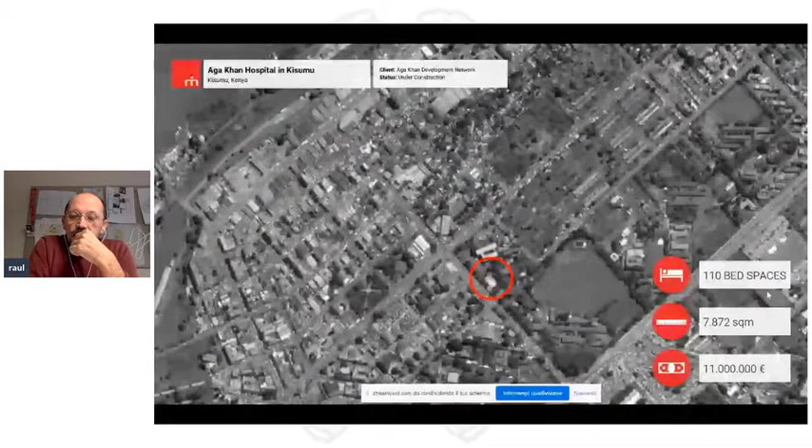What I'm going to share today are just a few projects focused on the African continent. I'd like to start with a sentence said by the master jury of the Aga Khan Award, which we won in 2013, summarizing our approach: that it is possible for a low budget project to combine functionality with design, utility with beauty, affordability with excellence. I think the jury perfectly captured the approach we want to share in our work.

The first project is a recent one we developed in Kenya, in Kisumu, for the Aga Khan Development Network.

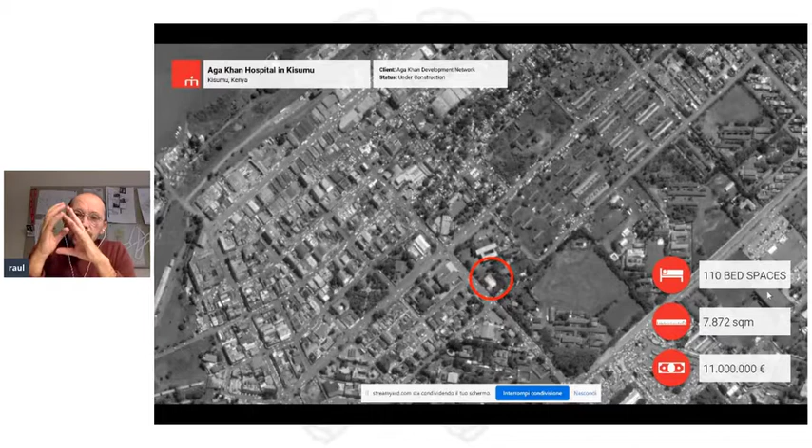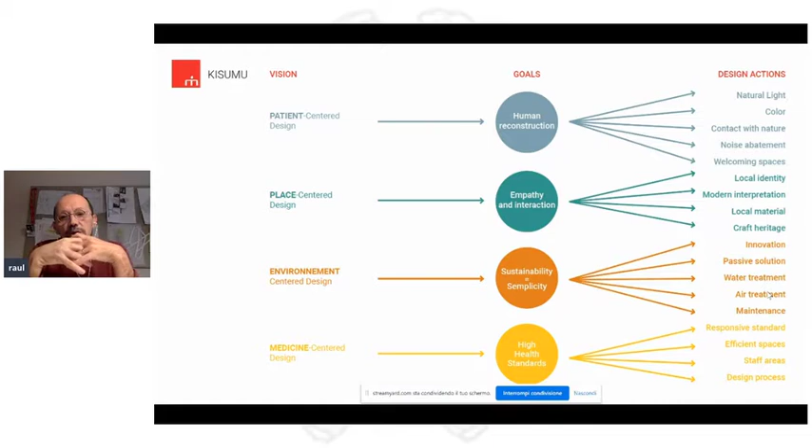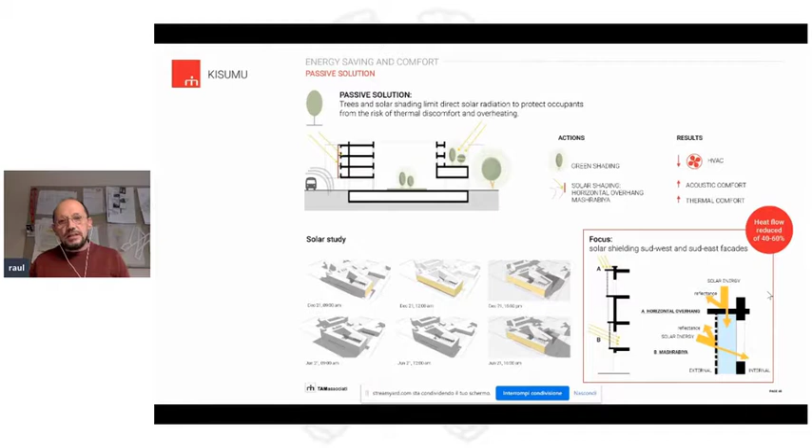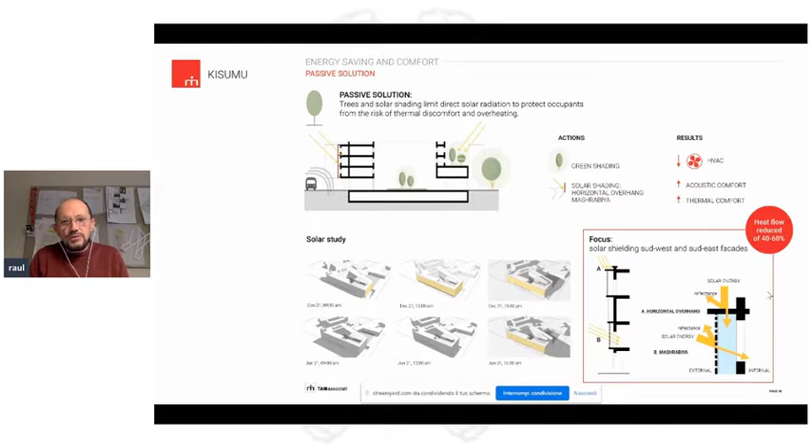The first thing we normally do in any project is study the environmental conditions surrounding it. So the design starts from deep attention to natural resources, the natural position of the building, and how we can work on its passivity to perfect its capacity to react to environmental conditions. The result of this approach was a very compact building with a central courtyard that works like a chimney to generate natural ventilation.

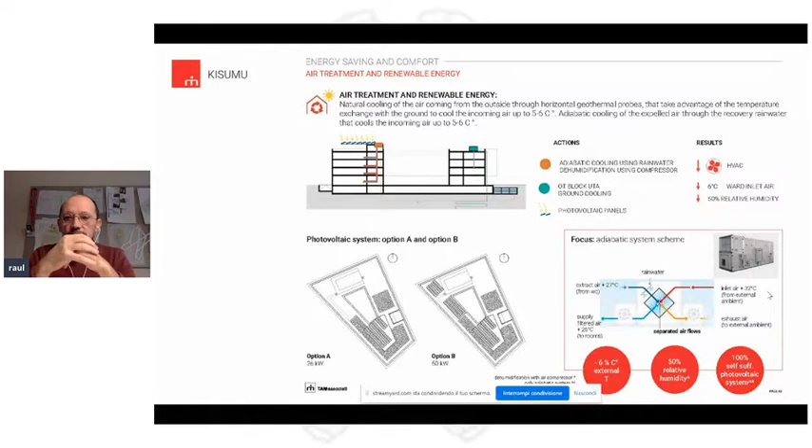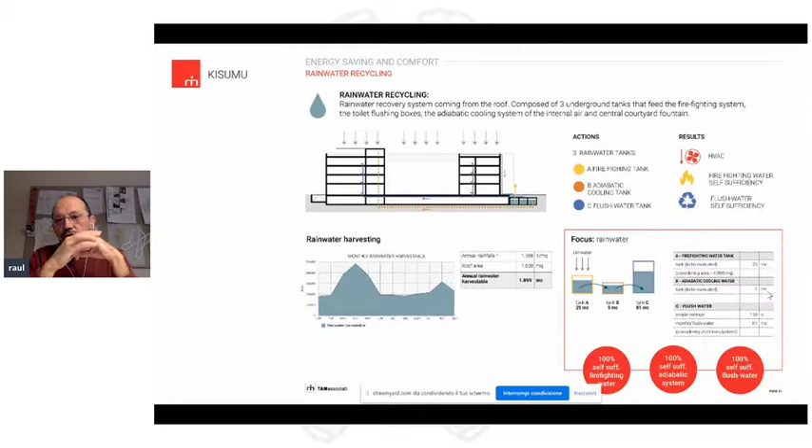From this point of view, we designed all the equipment trying to minimize the use of equipment, energy, and resources—in this case also recycling water, with rainwater harvesting used for cooling and other activities in the hospital.

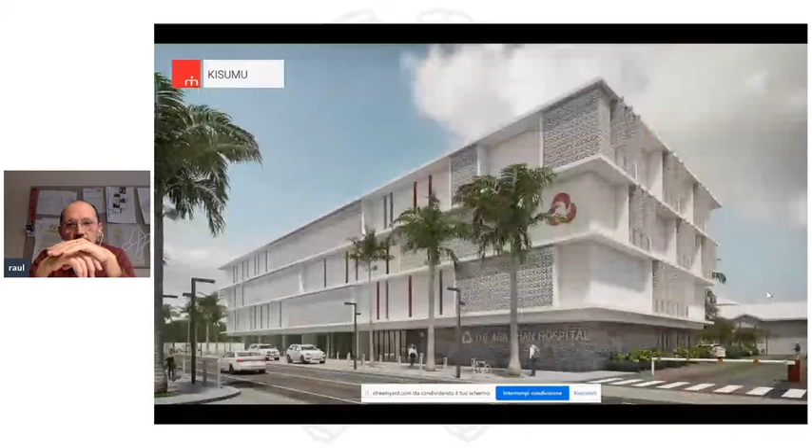This is just to give you a clue of how the design of a building starts, not from an abstract idea, but from the environmental impact of the building that is leading the design.

What I would like to share with you now are some examples of hospitals we designed for Emergency, the biggest Italian NGO, like Médecins Sans Frontières. It's an NGO that works since 1994, basically all over the world, providing hospitals that give health treatment free of charge in regions of poverty, of war, or in very complex contexts.

Specifically with the project called African Network of Medical Excellence, this project was organized through the NGO with the Ministry of Health of several African countries, including Ethiopia, with the idea of setting up in different countries centers of excellence that could spread their service to other countries—creating a network of hospitals of excellence to provide healthcare to the whole continent, using airplanes and this kind of connection.

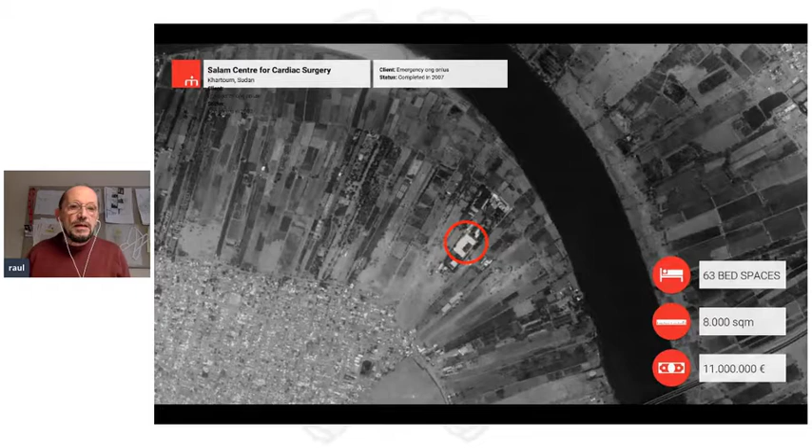The first example is a very old hospital, from 2007, the cardiac surgery hospital based in Khartoum, called Salam Center. It's a small hospital providing cardiac surgery. This hospital has been the first hub of this network, and the hospital we are going to share with you today, the Uganda Pediatric Hospital with Renzo Piano, is part of this network.

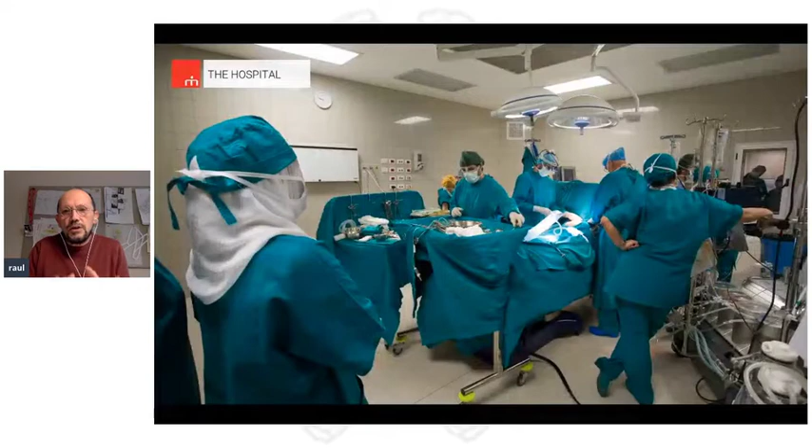As you can see, the hospitals are very basic structures, very simple, using as much as possible the local resources, but especially using the capacity of the hospital to be embedded in the surrounding. Here we are on the shore of the Nile River. The use of green, of nature, has been the basic element to design the hospital, so the hospital has been designed around the natural resources.

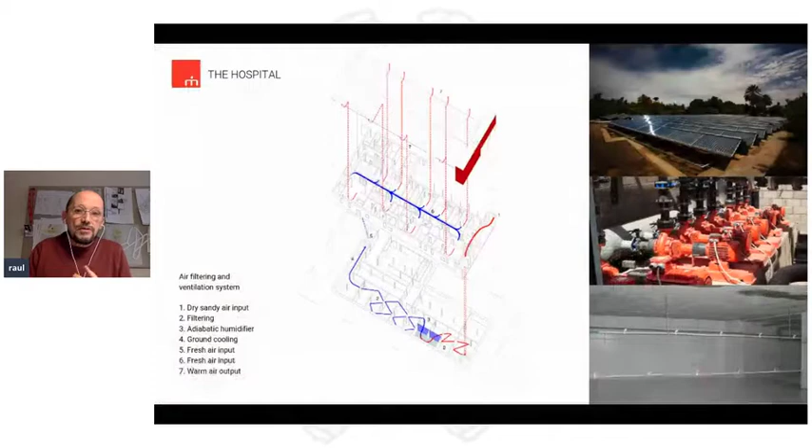This has been one of the biggest installations of solar water panels, transforming the heat of the water from the solar panel into the cooling of the system. This was one of the most innovative projects at that time for cooling in desert areas, using solar resources and water cooling.

Next example of using resources is the container compound—we used the containers we brought into Sudan with the medical equipment, 92 containers, and transformed them into a compound for the medical staff. You see here the use of this double shell to protect the container from direct sun, essential to the sustainability approach of this project.

Again, the hospital is designed around the garden and the green present in that area. With this project, by introducing the plantation of the garden, we could save 76 tons of CO2 emissions.

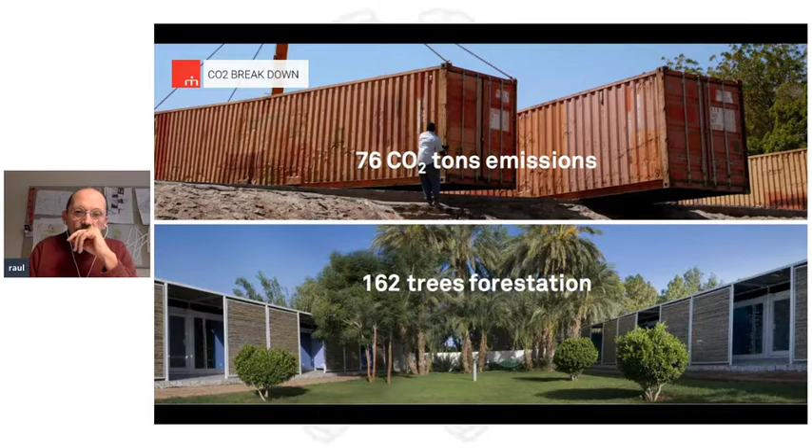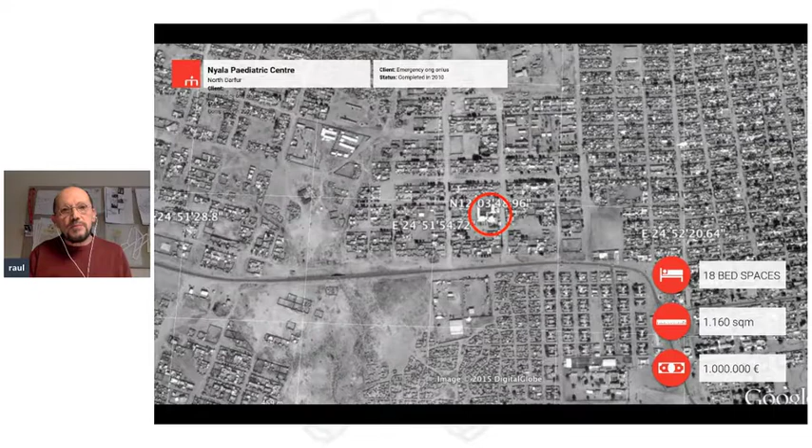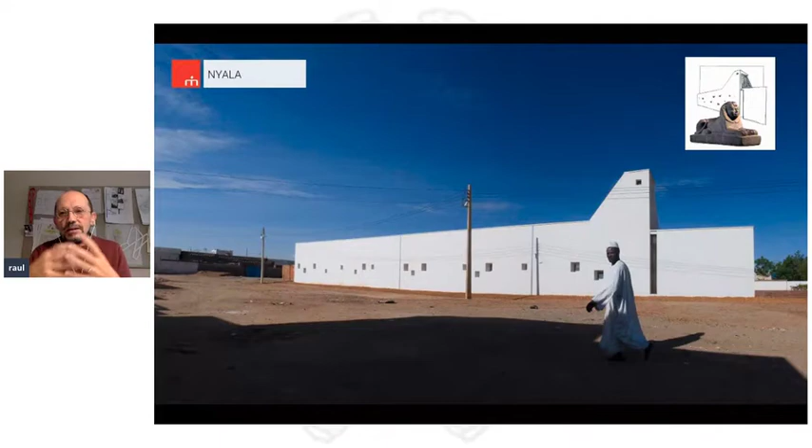These are small projects developed around the Salam Center—two examples in Sudan that are hubs serving the main hospital. The hospital has been designed in a very low profile in terms of integration in the genius loci of these small cities in Sudan, and inspired by physiognomic elements typical of that culture. The wind tower you can see growing up is part of this approach of designing a project that can be understood by the local population.

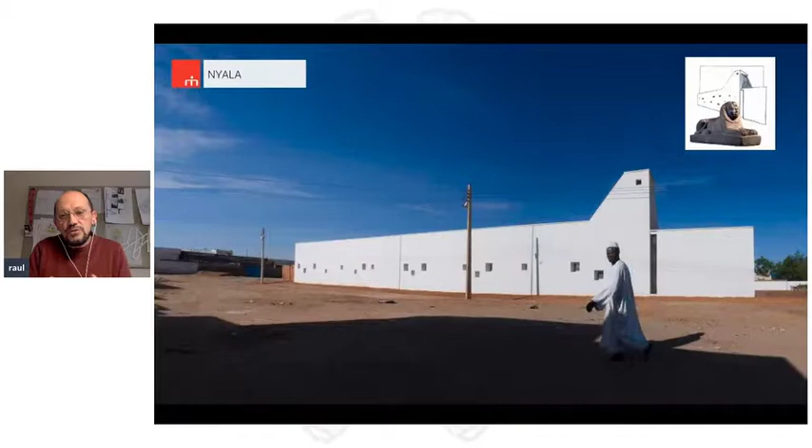This is the central garden. Gardening is the crucial element in the process of healing.

Here we developed the project of adiabatic cooling. Basically, we catch the air from the wind tower, bring it into the basement, the air is washed, and then with the adiabatic cooler, we inflate the air into the building. Through this passive system, we could succeed in cooling 800 square meters with 6 kilowatts—basically the kilowatts you'd use for one AC unit—just to cool the whole hospital.

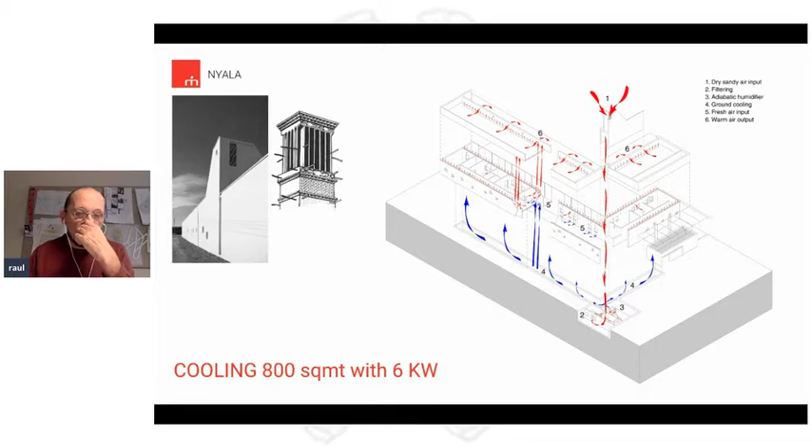The other example is the pediatric clinic in Port Sudan, an important city in Sudan. It's the main harbor, with a lot of problems with refugees coming from different wars.

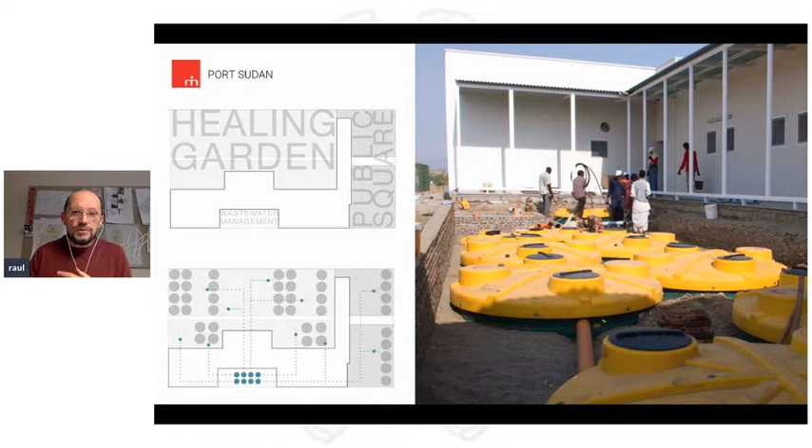Again, the clinic has been designed starting with the idea that we want to bring a garden into that desert. So the design of the clinic starts from this idea of recycling the water, generating a system of recycling the water of the clinic to create the garden.

Here you see this became sort of an outpost in that area, because this is the only garden present in this huge desert area. So here the design of the hospital starts from the approach to sustainability and environmental design.

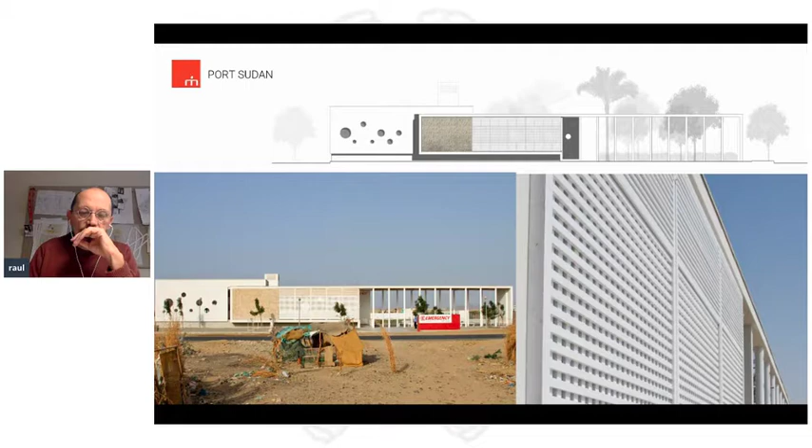These are some slides of a very small clinic, and here again we improve more and more the system of adiabatic cooling that we experimented with in different hospitals. So we succeed in cooling the hospital with very low energy. This has been extremely successful because it gives the hospital extraordinary resilience in terms of approach to the local context, the limit of electricity, the limit of energy, and the limit of resources.

Now we come to the pediatric clinic, hospital, in Uganda, which has been this extraordinary experience that we developed with the Renzo Piano Building Workshop together with Milan Engineering. It's a 78-bed, small hospital. It will provide surgery for the whole region, pediatric surgery, and will somehow be the second hub of this African network of excellence hospitals.

It's based in Kampala, very close to Entebbe. As you can see, the approach of the organization tries to choose a location that gives quality to the patient, because nature is also part of the healing process.

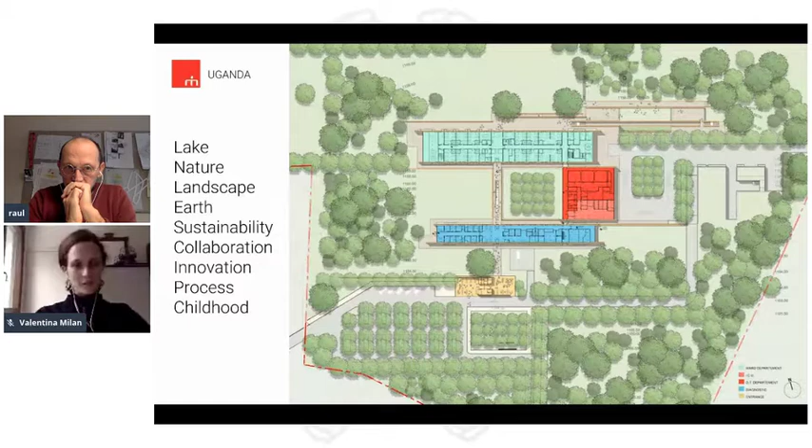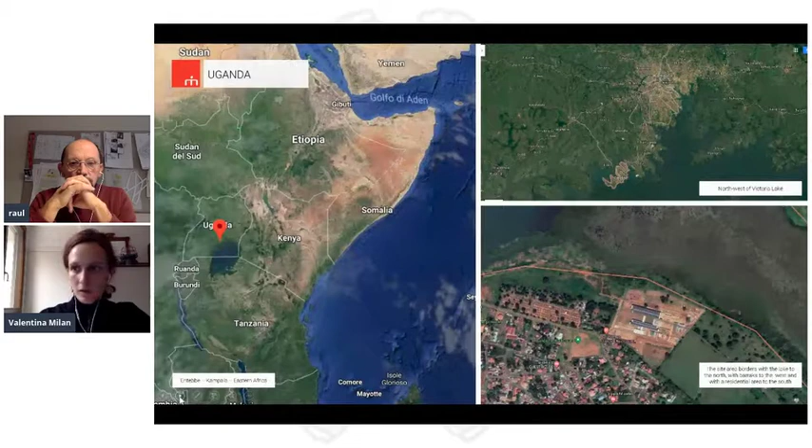So the hospital is really close to Victoria Lake, so the relationship with nature and water is very important. It's close to a residential area and close to a barracks area, a military area, and it faces Victoria Lake.

The structure is a comb structure with three main buildings, let's say four with the guest house, and five with the entrance blocks.

So through these five blocks we get to the entrance, and then we pass through all the buildings with the entrance and examination areas. In red are all the operation theaters and ICU functions, and up here in light blue is the ward area for children.

It's important to say this is a hospital just for children, and because there are young people staying here, we thought - it's something very common in emergency projects too - to have a guest house where the family can stay during the children's stay, for the family too.

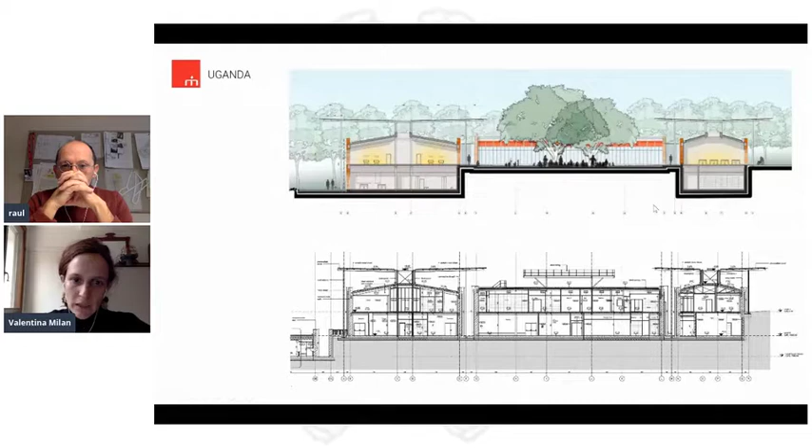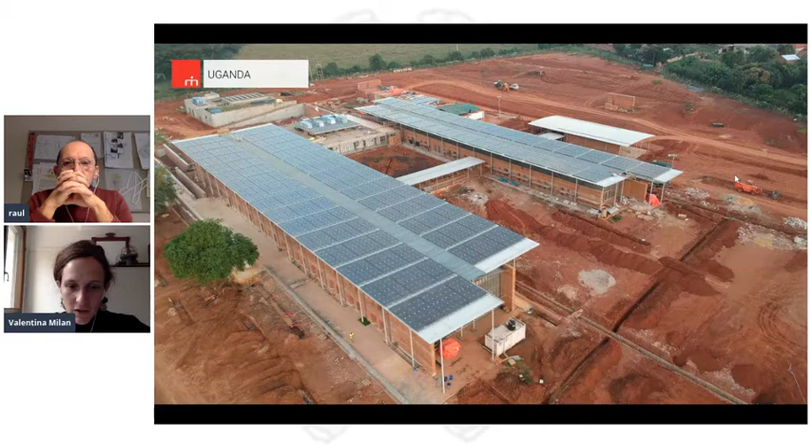Massimiliano will explain this aspect better. The relation with nature is always important, so we have this main garden facing the whole hospital, which is built on a slight slope. Here we can see the color of the earth, which is very powerful and strong, and the texture of the earth is the same in the wall as in the final result.

Here you see the construction site pictures. The color is very strong, and the view from the inside is toward nature, toward green, and toward the lake.

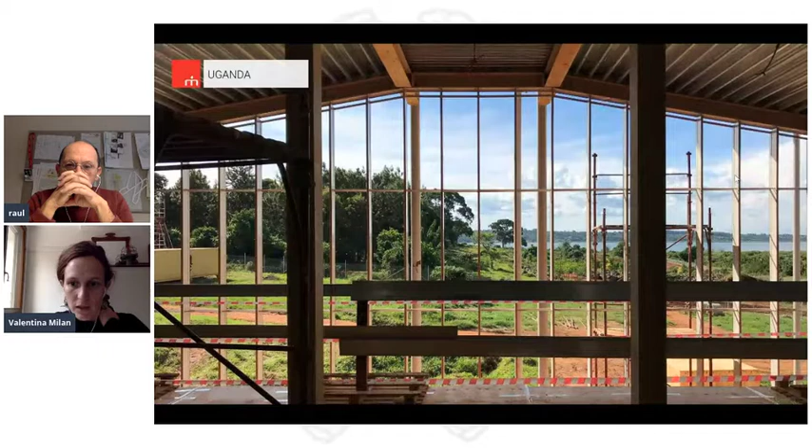Here's the entrance block where the family can stay before going into the hospital, and from here you already have a view of the lake. And here it was finished.

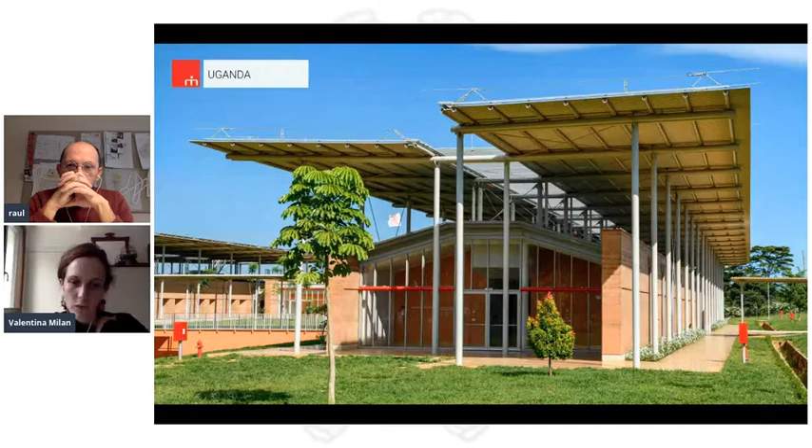We have this important feature: two roofs here. One is the roof of the hospital, and one is the photovoltaic roof, which we will see. The green is always very important and close to the hospital.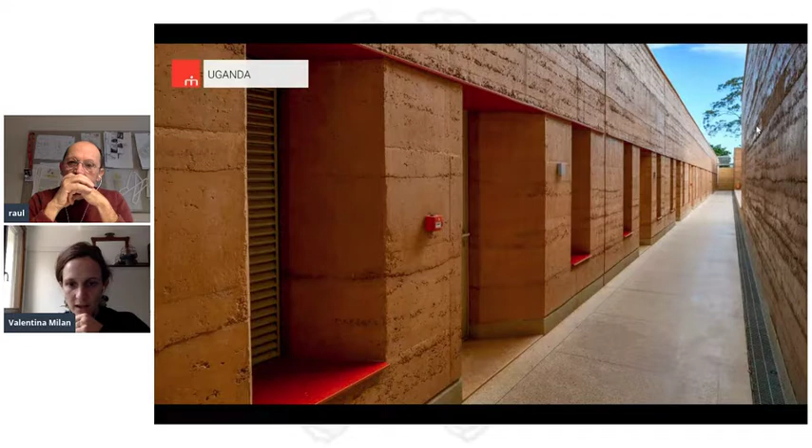Here we are in the main courtyard between the two main buildings, where you can go down to the administration area or up to the ward part. And here is the guest house entrance, where the family can stay while their children are here. That's the side facing the lake.

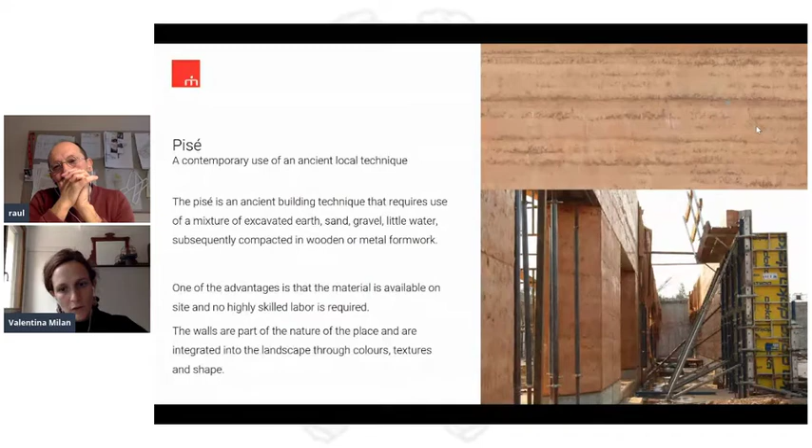I was telling you before about this technique, which you may know, it's a very ancient technique of building walls with earth, with soil.

And it's very traditional in some African countries. So how it works: between two walls, this earth is pressed. It's a mixture of earth and sand.

Normally, traditionally, but with the help of Milan Ingegneria and many researches, we improved the structure of this wall.

What's very interesting on the architectural side is that the texture and the color of the walls really disappear in the landscape, blending everything together with the real, existing soil and the existing nature.

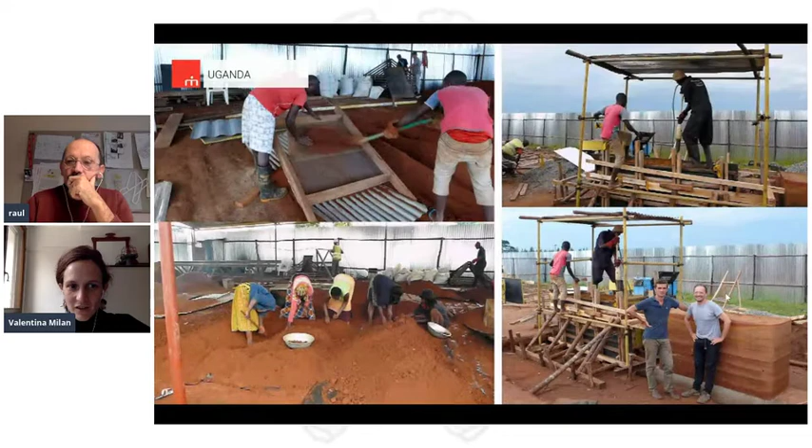So here were the first experiments done with local people, to see how the mixture could be and how. This is the very first mock-up, very artisanal one. That was the first trial.

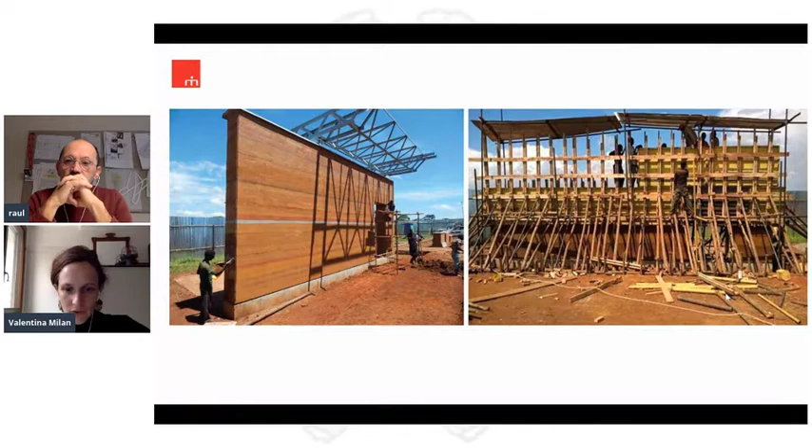And here was the final one that maybe Massimiliano will explain better. You can see here the texture, the horizontal lines - we have the layers. You can really see the layers of pressed earth in the material.

Massimiliano can talk more specifically about the wall, I think, in a more technical way.

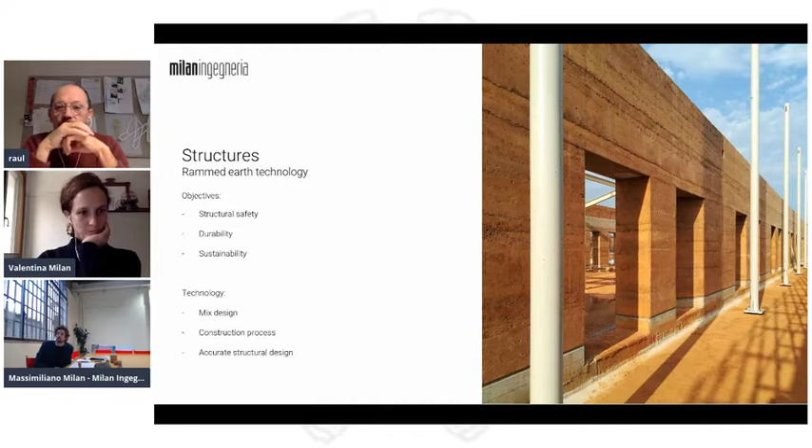Thank you, Valentina. Thank you, Raul, and thank you everybody for inviting me here. I'm Massimiliano Milan. As said before, I was the structural engineer that followed the hospital in Uganda. I'll try to explain the rammed earth technology, and mostly the rammed earth technology applied on this project.

At the very beginning of the project, we fixed some objectives: structural safety, durability, and sustainability.

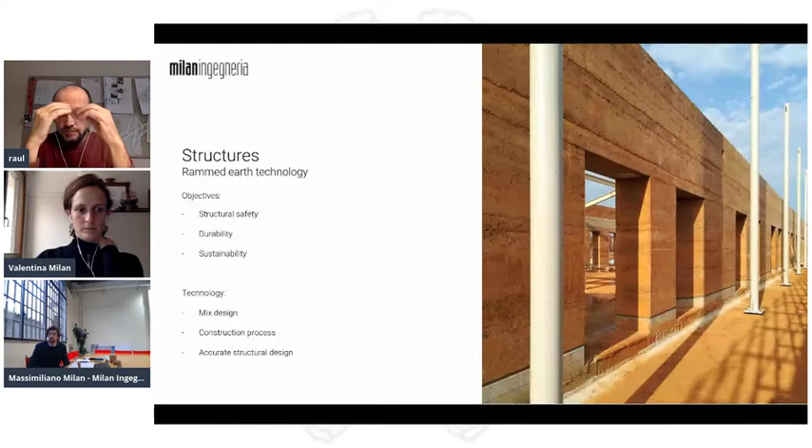Structural safety, of course - we're talking about a hospital, so it has to resist static loads, earthquakes, and wind loads. We had to take into account all these forces and improve the structure to guarantee safety, and mostly to be the safest building in the whole area, so it could be a safe place to be in case anything happens there.

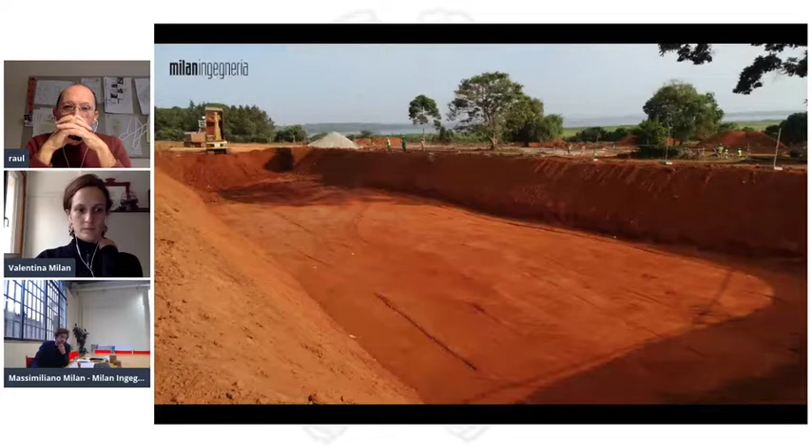Durability is also something to take into account. Of course, we're doing a hospital for an NGO, so we have to minimize the maintenance, the renewal, and the restoring works. That's something important to consider in a hospital like that.

And sustainability - of course, you saw in the picture that we're on the green coast of Lake Victoria, so it's something that was in the goals of TAM and RPBW, but it also comes out automatically in this place, to take care of the sustainability side of the project.

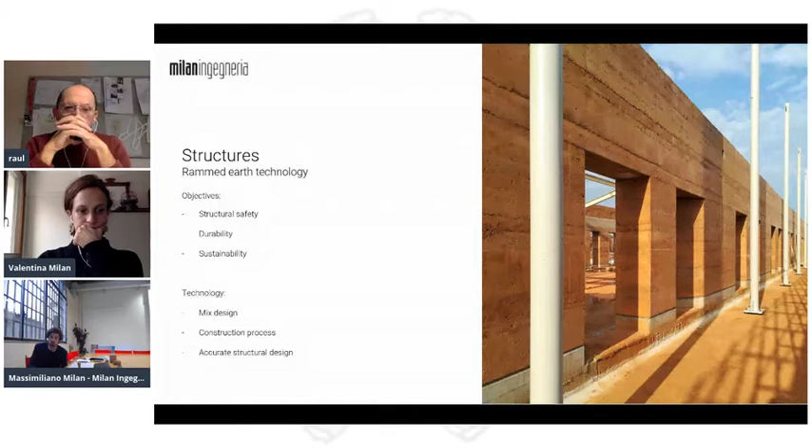To solve this, we will now see the technology we improved to reach these goals, which will focus on the mix design, on the construction process, and on the accurate structural design and engineering of the project. So we can go forward.

I will try to explain the technique and the solution going backwards, so from construction to design. The first step was the excavation, so we excavated to do the underground floors and the foundations.

You can see the wonderful color of the earth, and that was an important step for the project, because from here we took off the clay and silt that we used to build the walls.

The clay and silt were sifted just to take, as I was saying, the clay and the silt - not the gravel, not the organic materials inside, or the bigger-size grains you can find in the soil.

And that was mixed with other materials. The mixture you get at the end is really well studied, with accurate ratios of every material, and that is called mix design - I'll go back on this later.

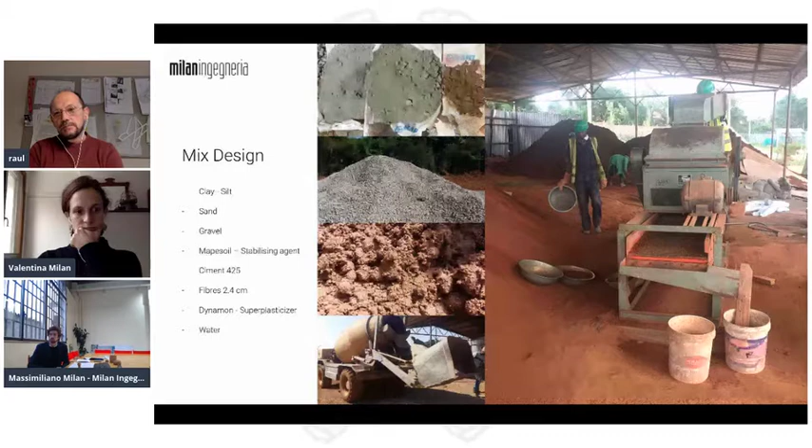So all the elements are mixed together to get a good consistency. You can see here they're mixed in a concrete mixer, to get the right consistency - it doesn't have to be too fluid, but not even too solid.

We can go forward. Then the mixture is contained in formworks, similar to a concrete formwork. Actually these are the same formworks used for concrete, and the mixture is put inside the formwork and pressed.

The formwork is really important, mostly for the architectural side. As with architectural concrete or any cast material, the formwork gives the texture on the outside that we want to achieve. So having a good formwork brings you a good surface finish.

So that was really important - not only the material that is contained, but also the box itself. It's important to have the good finishing.

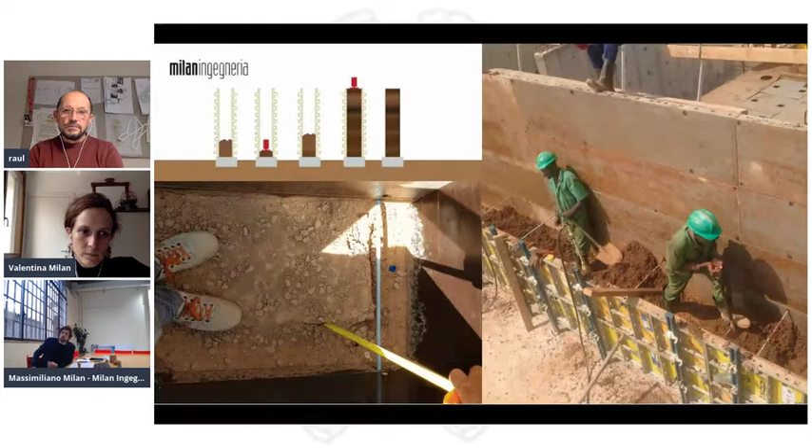So the rammed earth is compacted inside the formwork. It's really important to have the right compaction of the material, because rammed earth increases in resistance proportionally to the energy with which you compact it. The better you compact it, the better the material you will have - that's really important for rammed earth generally speaking.

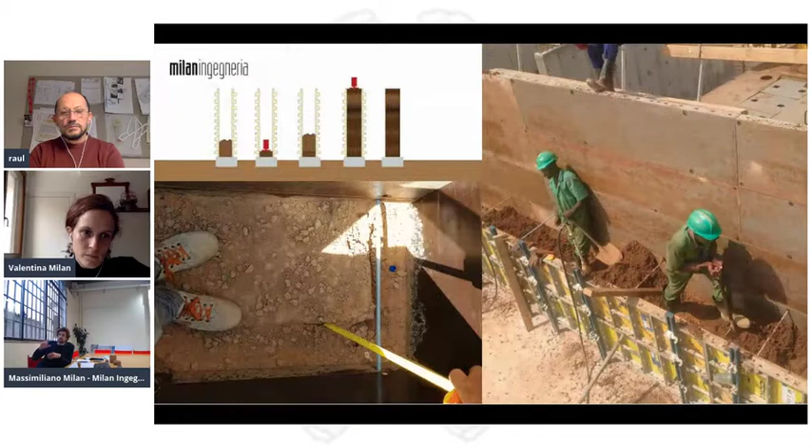Every layer you put inside the formwork, more or less, it will end up half of every layer. So also this you have to take into account to understand how much material you have to use and how to reach the level that you want.

For example, here you see a detail of the formworks of the windows and doors. That's something important, the layers we studied with TAMassociati and RPBW. The alignment of the windows had to be the same, first for architectural reason, and second to have the lintels of all the windows and doors aligned with the layers of the earth.

Both for construction reason and for architectural reason. We can go next. So here you see the proceeding with the walls and the mounting of the formworks.

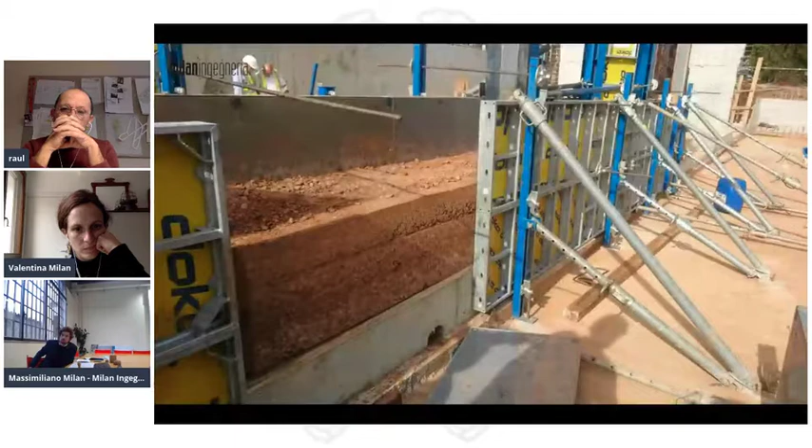Here you see the first 3 layers that were used between the concrete and the earth. There was a fiberglass layer that is really useful, since Uganda is a really humid place, and it's really important not to have humidity come up to the wall from the ground. That's really important for the durability of the wall.

This image tells something about how to do rammed earth. When you finish casting it, you take off the formwork. It's not finished work. You have to mature the material, so you have to keep it wet.

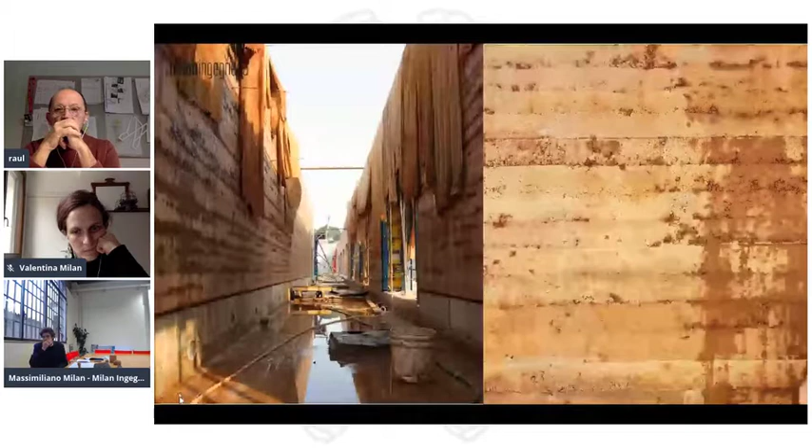A big problem for rammed earth is the shrinkage. What's the shrinkage? It's actually the volume decrease because of the evaporation of the water drying the material, so it becomes smaller. The volume decreases, and because of this, the material can crack a lot - rammed earth can crack really easily.

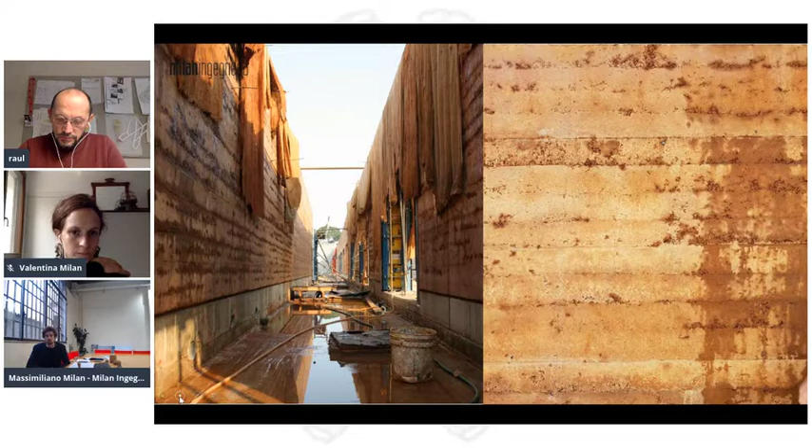So to limit this effect, you have to keep it wet for a long time, and you have to do it even more in such a warm place as Uganda was. So we kept it wet for 1 month after construction, and we saw the results in the next slide, minimizing the cracks.

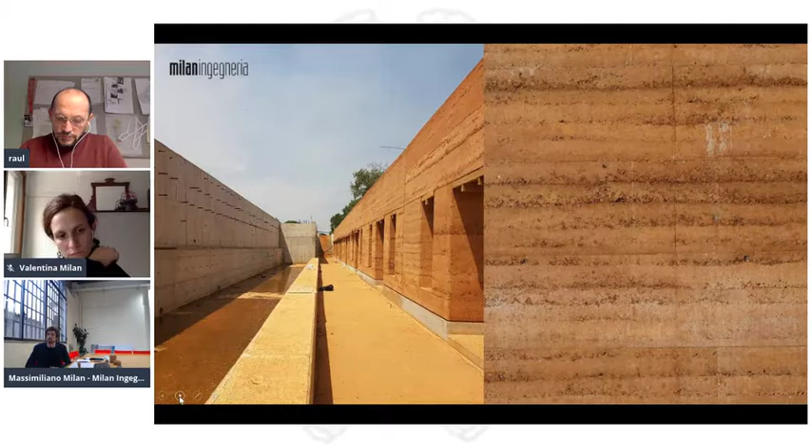I'll go back on these arguments later. The curing of the wall and keeping it wet increased a lot both the resistance and the finishing, and avoided cracks. That is also really important.

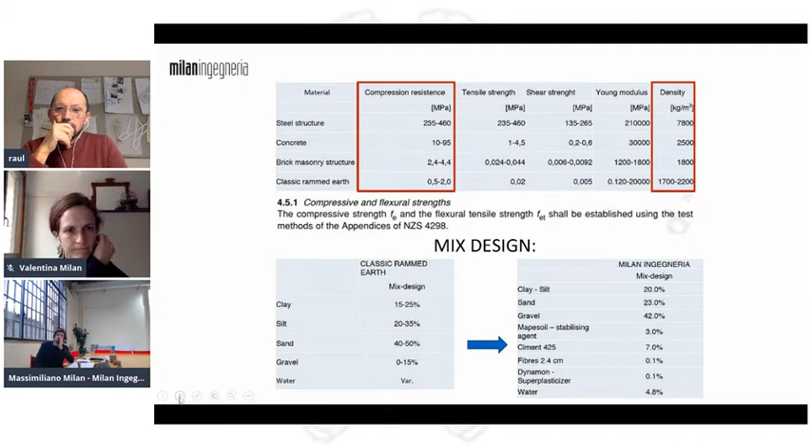Before I was telling about the mix design - the mix that has to be done for the material. If we go next, what I want you to focus on is not all these numbers, but mostly the compression resistance and the density. You can see different materials here.

Steel is around 400 megapascal, concrete around 40 megapascal, brick masonry about 3 megapascal - that's the compression resistance of a material. The classic rammed earth usually goes 0.5 to 1. If you do it really good, you can reach 2. So it has a low compression resistance, the classic way of doing it.

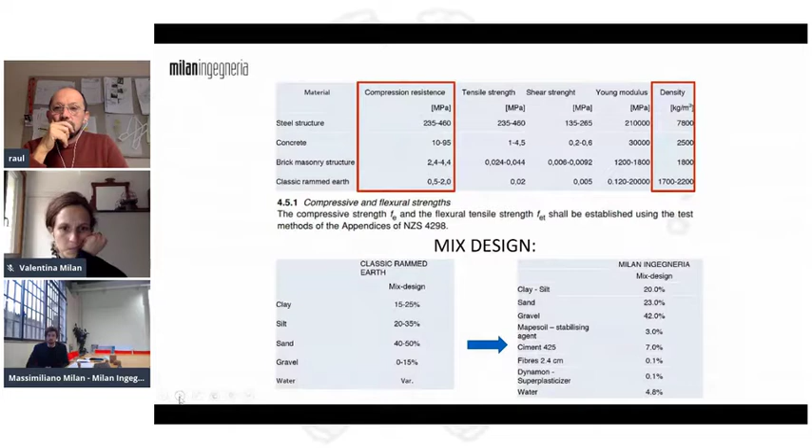In this hospital, at the very beginning, we said, okay, we have to find a way to do it better and reach a higher compression resistance, because we're doing a hospital and this is not enough for the resistance needed for the project. With more than one floor, it's really deep, there's heavy machinery to support, so we had to increase that.

But we wanted first to reach the goal of having this rammed earth wall. So we studied the way, and we developed a mix design with other stabilizing agents. So from the classic rammed earth, we developed another one in which we added other materials.

Every material has a meaning. Of course there's the clay and the silt that we found on site, also the sand. But the gravel - we increased the quantity of gravel that is really needed to improve the resistance of the material. We did a lot of tests, trying different quantities of gravel, and the gravel allowed us to improve a lot the resistance of the material, the compression resistance of the material.

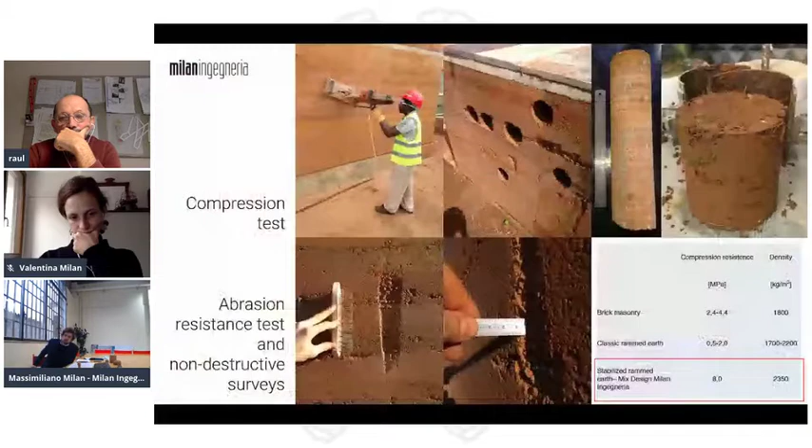The last test we did in the first mock-up was abrasion resistance. You go there with a steel brush and brush the surface with 10 scratches. In the classic mix design, old style rammed earth, with 10 scratches you go 1 centimeter deep. That means if I stayed there half a day, I would go all the way through to the other side of the wall. So that was another problem to solve.

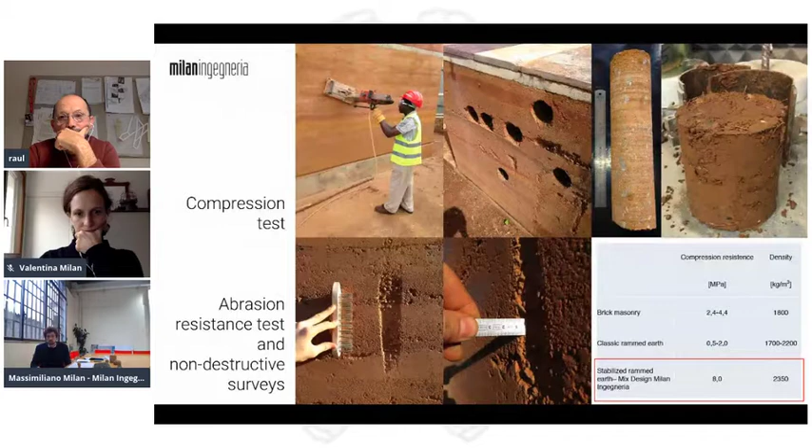The new mix design actually has a wonderful resistance to scratching. This isn't just because someone might go there and scratch it, but because there is a lot of rain, wind, and sand passing through, so it's something to take into account to ensure the durability of the surfaces of the wall and the structural walls.

The last thing that is really important, after the walls are finished, after construction ends and after curing of the walls, we treated the surfaces with a silicone-based material. It's a cream you just put on the surface that protects from water, a water repellent material that avoids penetration of water inside the walls.

This sample was a mock-up we did, and after 12 months you can see the difference between the half that was treated with the silicone-based treatment and the other one without it. So it protected the surface, and by protecting it from water, it also protected it from organic attack.

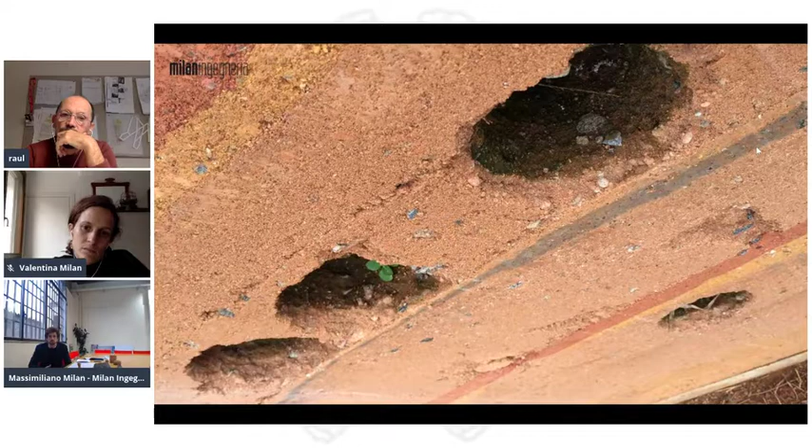You can see here some samples we did inside, after 12 months. The surface is still perfect, and you can see that this protection penetrates 1 centimeter, ensuring protection of the walls if there are no holes or cracks in it. That was another important side to keep into account to control the cracks.

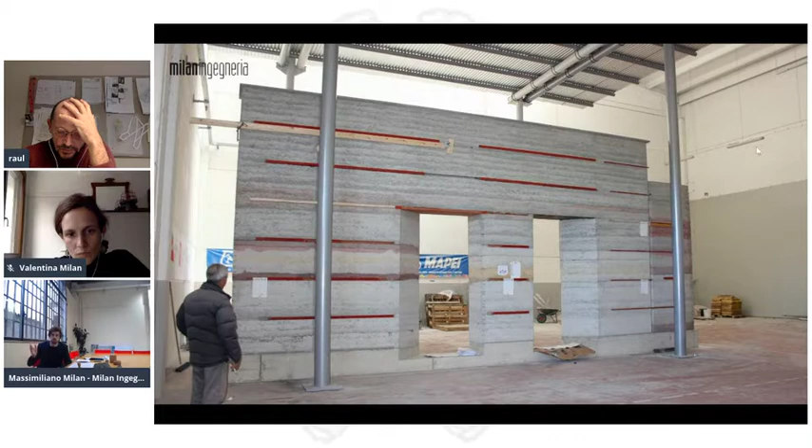So we did a lot of tests, and we did a couple of mock-ups, the first one and the second one. The second one was in Italy, with a really bad color of clay.

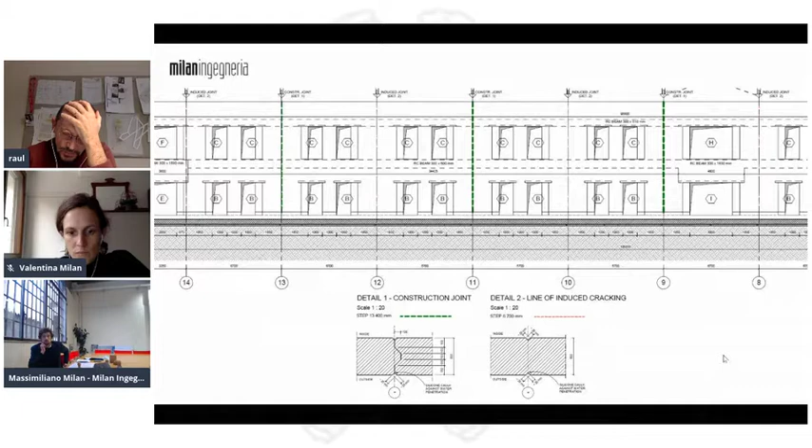I said shrinkage is really important. We controlled it with some construction joints. We knew the walls could crack, so we created some joints, induced cracking joints. You can see the red one on the right. We knew the wall could crack, but knowing that, we decided where it was going to crack, inside that line of induced cracking, to have control of the crack.

That's the result on the surface, which was also coordinated with the architecture to have a modularity of the wall, so it would be coordinated with them.

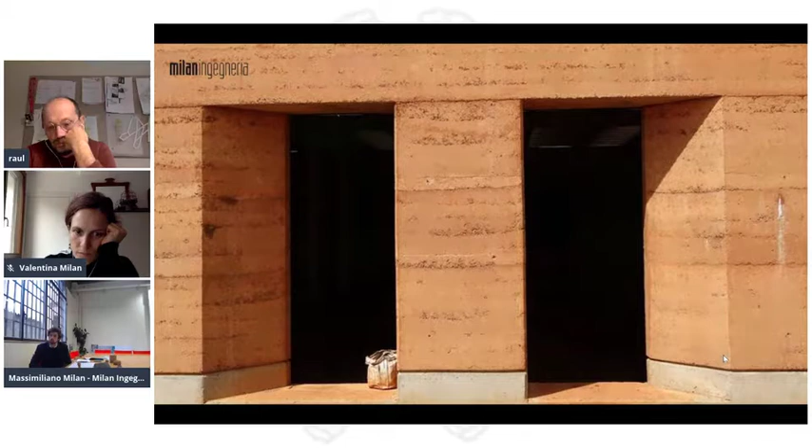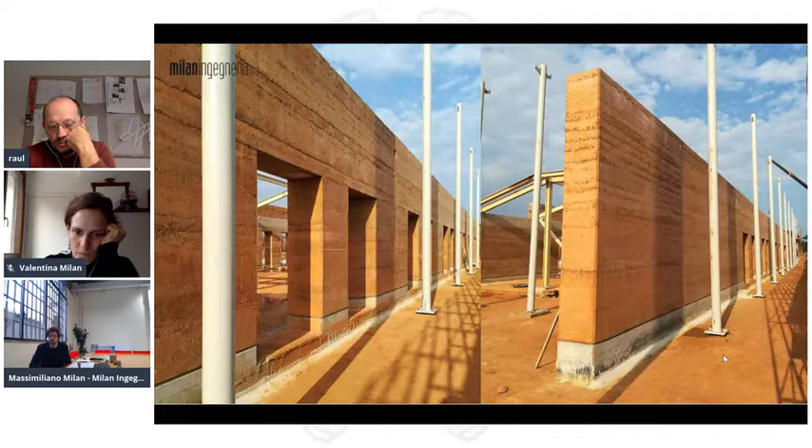Another thing that is really important is all the angles of the walls. Maybe in the next image it's more clear. All the angles have to be cut and decided to cut off, both for architectural and technical reasons. The angles are really hard to compact, but they've been cut off and coordinated with the architectural choice to give a good effect to the geometry of the walls, but also to avoid breaking it after construction over time. So all the angles you can see are smooth.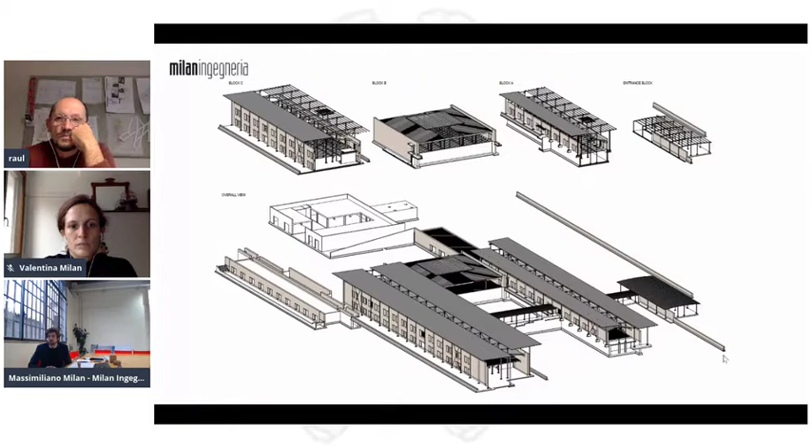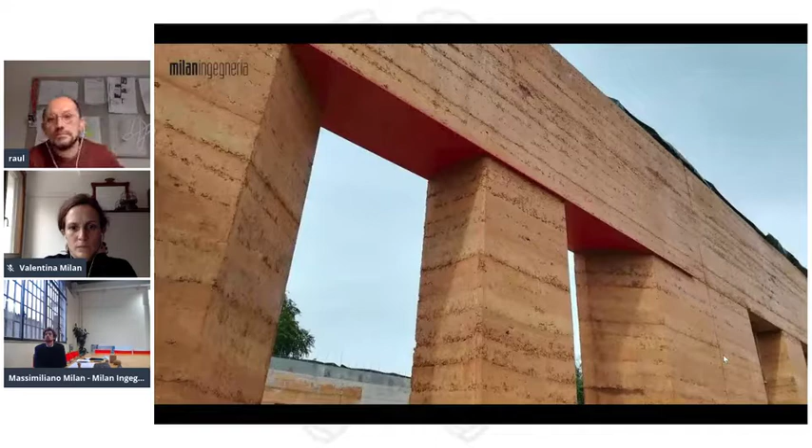We can go forward. There have been other technologies applied to the project. There was the steel structure for the slabs and the independent canopy. To attach it, we did some concrete curbs on the walls. These curbs were also used as lintels on the doors and windows.

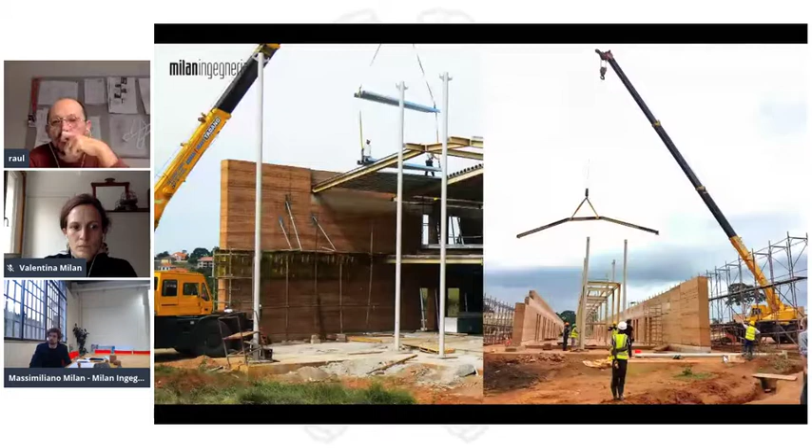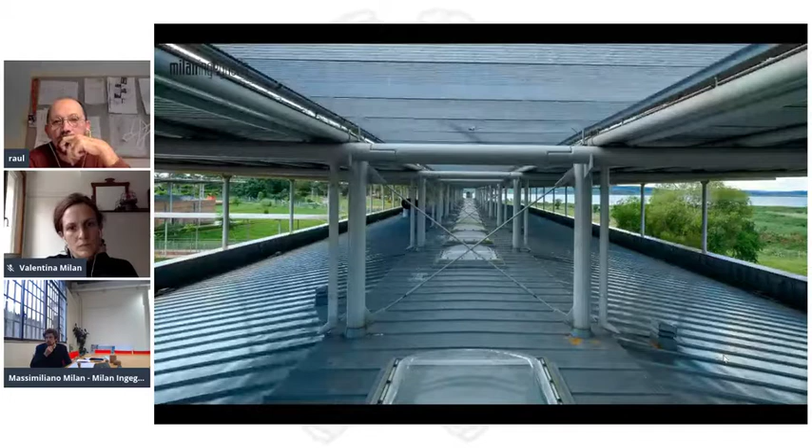Here you can see some pictures of the construction site. So the steel structure, internal steel structure, and the walls were going on the same direction until the end, which you can see finished - the steel structure and the rammed walls at the end of the project.

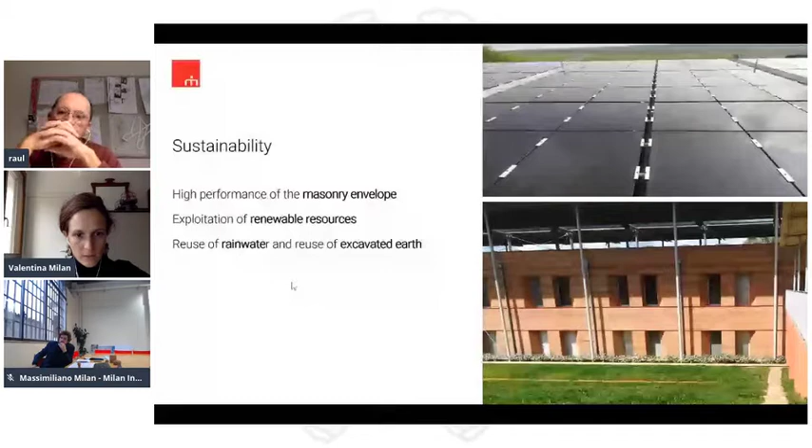Rainwater was reused. There is a big basin for reuse of rainwater, mostly for the fire system, and of course the reuse of the excavated earth, as Massimiliano told you.

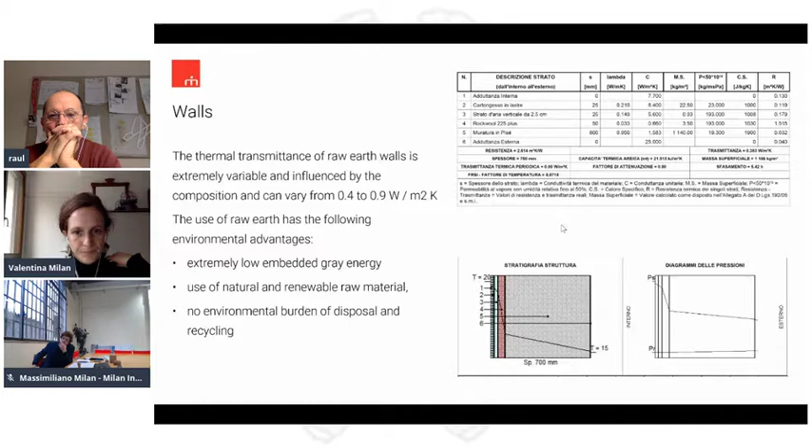So this is the roof. You have a wonderful view also from the roof, maybe the best one, and the in-between space for a technician to go and repair in the future.

We talked about nature and nature as a healing factor. It's very important that, like in this case, a hospital is placed in nature and in relationship with it. Also the choice of trees and local flora was very important.

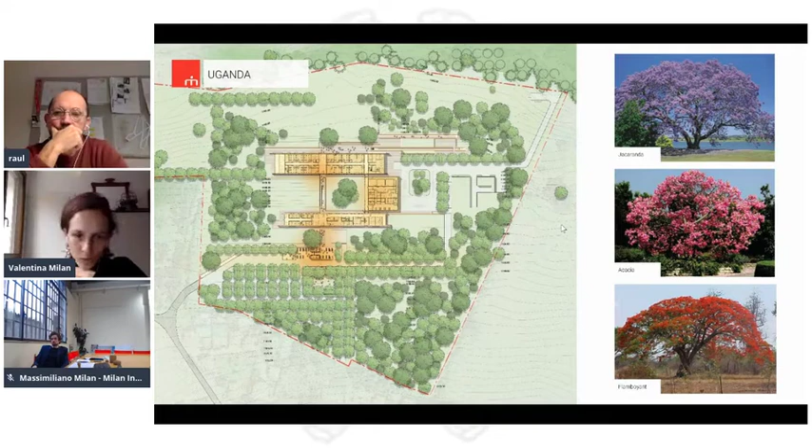Maybe you don't see the screen anymore, I don't know if there's a technical problem. But anyway, the trees were chosen were trees that we could somehow find there, so they were not imported from very far away, but were local trees, of course.

And of course, here it's very easy also to grow plants because of the very nice environment. So what's interesting about the relationship between architecture and nature - here you can see the relation between the building and nature.

And here's the main garden, so maybe they have to grow a little bit more. So the lake again, the central yard.

What was interesting during the site was that all the trees that were planted there were put in air pots in a nursery right on the site, by the site. So we found small trees, and during the construction they grew.

So they grew along with the building - they started with the building as well. They were not planted afterwards, but before, and then they were just set in the final spot after construction. Here was the space for the nursery, so it was really by the site, and then these small trees were put in the garden and in the area.

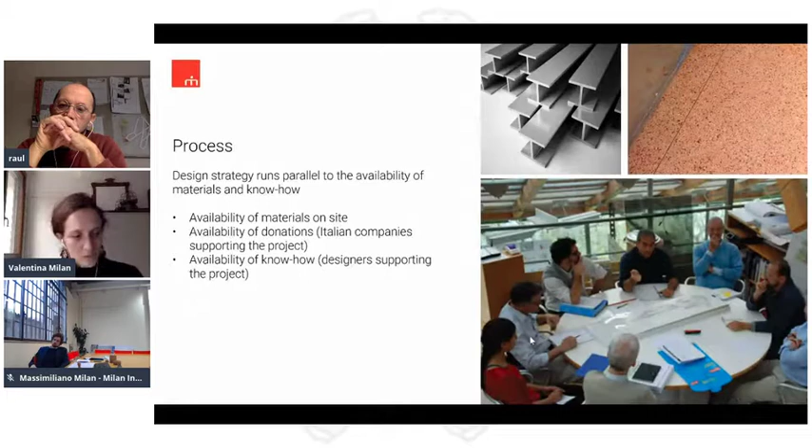So if we don't find a special plant or a special material, we have to decide for something else—something which is available and has a limited cost. So availability of money, of course, of materials and know-how, so if we have people that know how to do something locally.

So it was a big team, that's for sure, and a very advanced team also. So how we worked between BIM design and analogic design somehow, we used a cloud platform for BIM design—building information modeling with Revit.

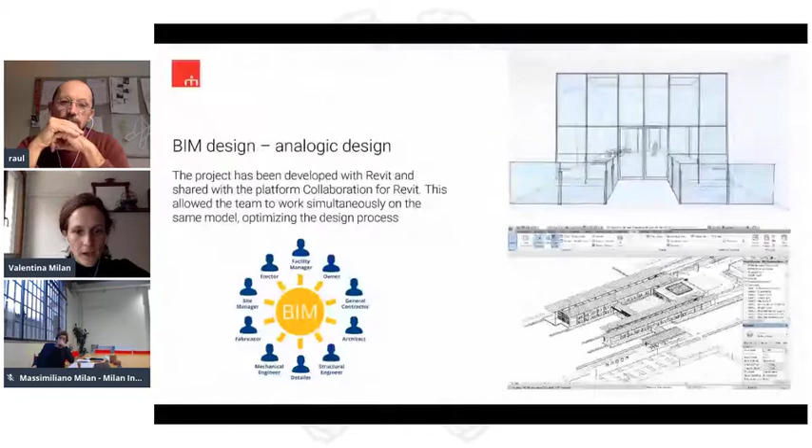But in parallel, we of course used sketches and exchanged information from all over the world, because we were in Italy, the client was in Milan, and the site was in Uganda. So it was a wide exchange of information. We had this Revit model, the building information model, where we put all the information, but then we also used built physical models. So we composed both technologies to work on.

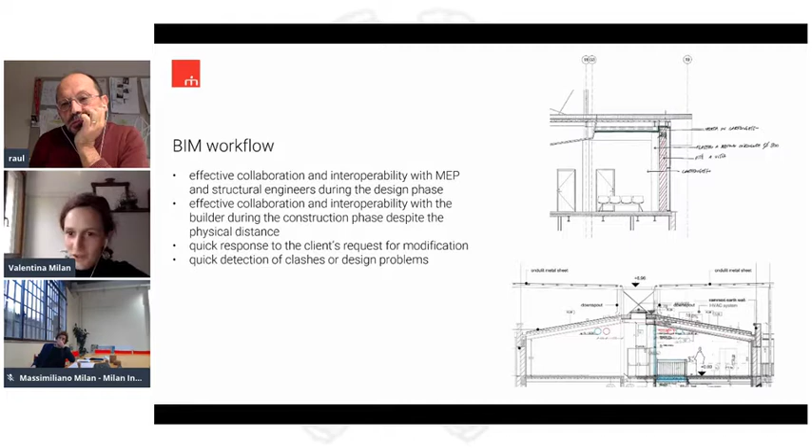So that was a little bit how we worked between very high technology and hand-craft too.

So maybe Raul, you want to tell more about the interior space? Well, just to close up this presentation, we try to give more space to the debate. I think we put on the table a lot of different approaches to the project, from the technological aspect to the building aspect, and also the process that Valentina was mentioning has been an extraordinary experience, because to work with Renzo Piano, one of the biggest architects in the world, has been something really extraordinary. But when I'm talking of collaborative platform, it's not only the BIM platform, but also the human approach to this project has been essential in succeeding in this result.

So just to finish our presentation, we will go through the work done trying to design a hospital tailored around the needs of the children, and also their imagination, their spirit. So the use of color, the use of natural elements brought inside the hospital has been essential.